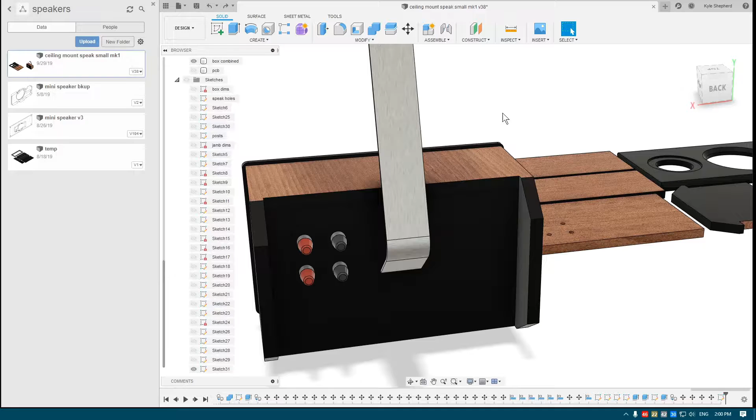So I realised I forgot something: the mounting holes required on this back panel. I already quickly drew out some of these holes, relatively evenly spaced. So I'll just go ahead and get these extruded.

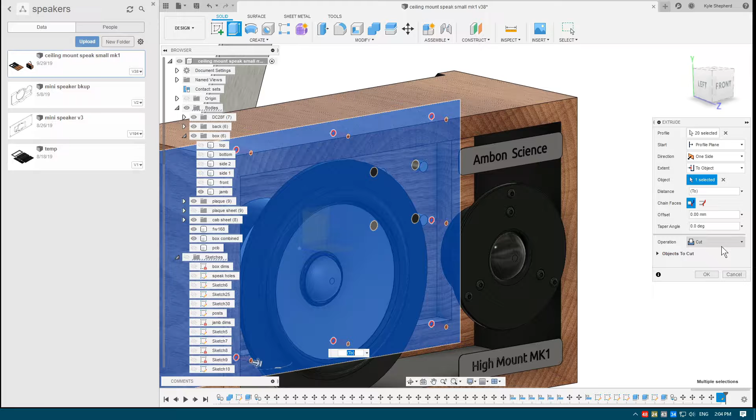Press E to extrude it. And oops, no, wrong option. To object. So cutting to the back here. It's only cutting the rear panel. So there we go. Now we have some well placed holes.

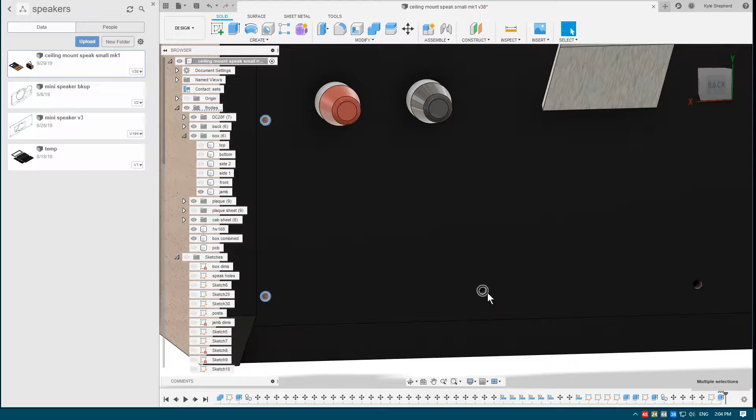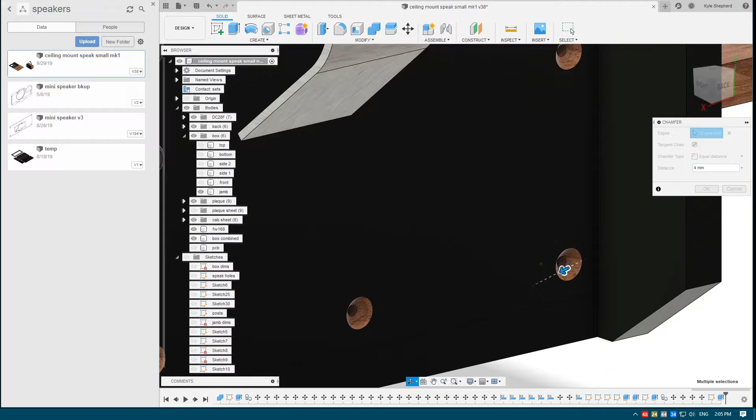I'm just going to select the profiles of these on their outside, and we want to add a chamfer. Now the chamfer is going to depend on the size of your bolts that you have in the end. I'm not quite sure what I'm going to use, but depending how you cut these, you can just adjust it later on. I'm just going to get this down roughly, see how it looks. That looks pretty good. That looks pretty nice.

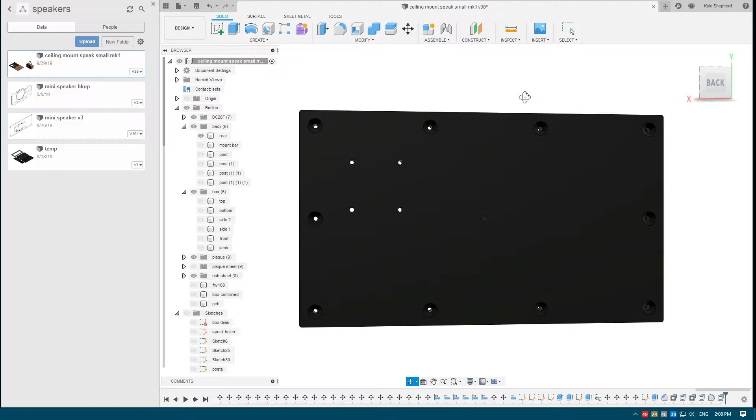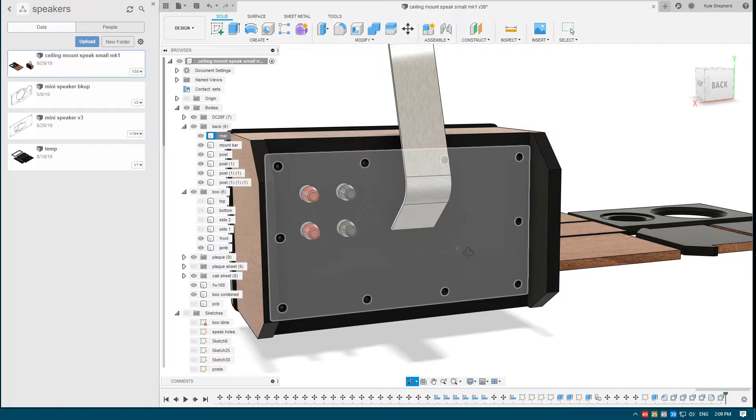And I'll do the computer aided machining for this because the blank panel I have at the moment, I will cut these out on that single panel, but I'll also update the total CAM file for when I do the second speaker, because of course this is a stereo set. The first one is turning out to be a bit of a test or prototype.

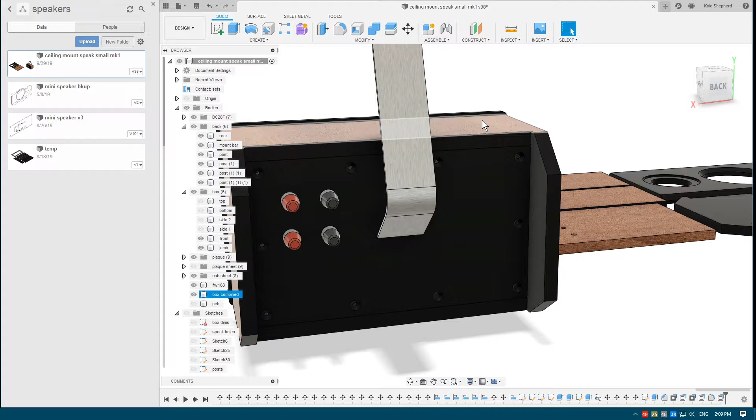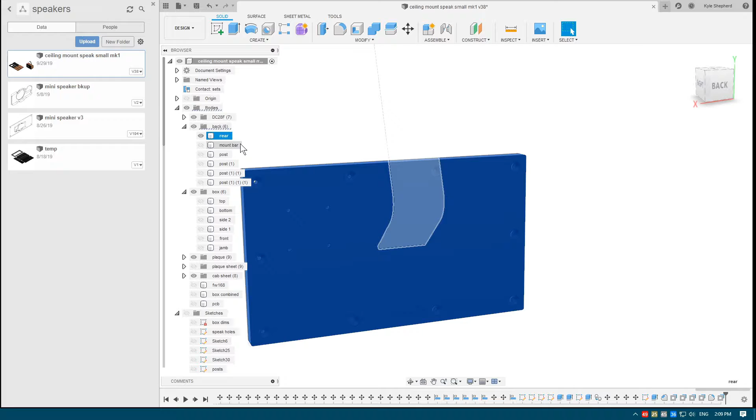So I'll just isolate this again. Go back into, actually I will duplicate it. Let's put you in here. Oops.

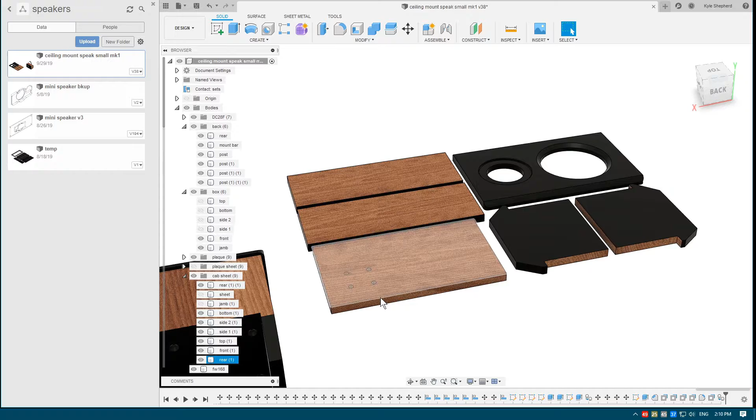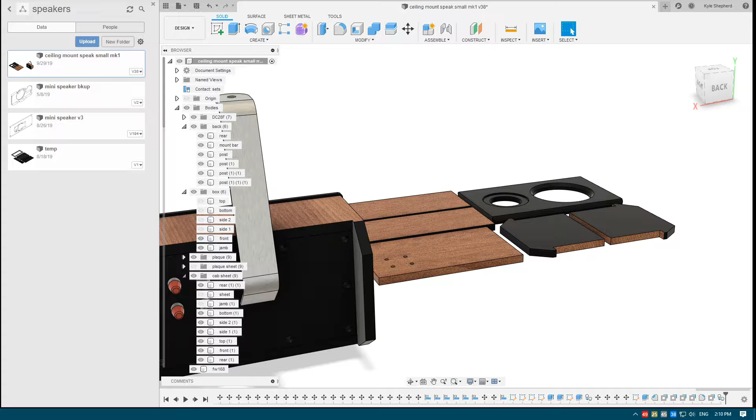The other thing I'll do, the jambs I have for the back of this, I might do a CAM profile cutout for that as well. I had an idea of how I can align them all, because my table saw is not the best. The blade is never 90 degrees for starters, so it's always slightly out. Where did that go? Here we go.

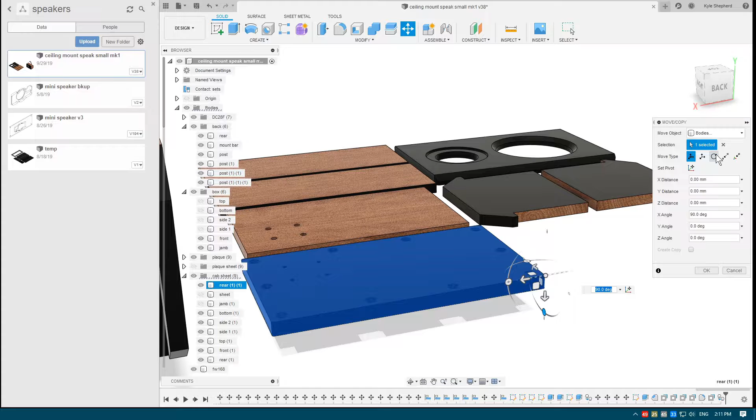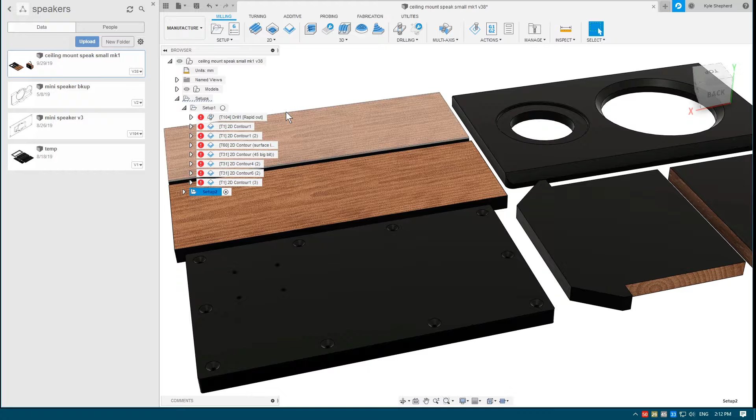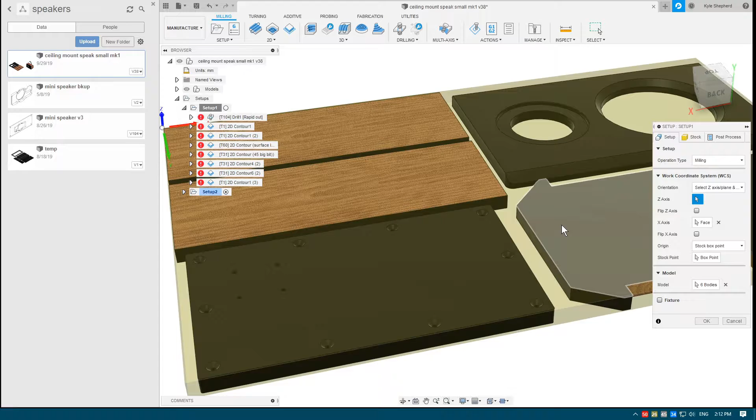Now we want to move a point to point. So move that point to there. Move. There we go. If I go back into the manufacture space, edit this. Where was it? So under bodies, we're going to re-add that body. And select our axis faces again. Select our stock box point again.

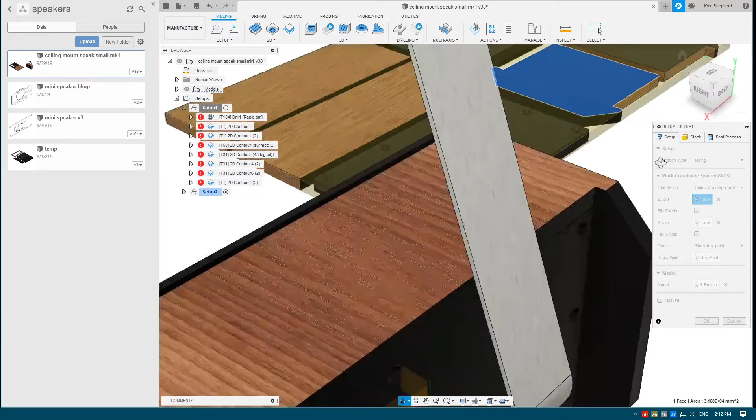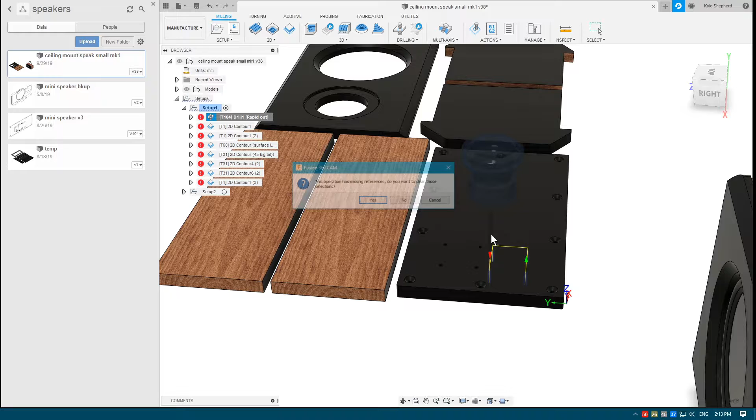Why is it using over there? There we go. So it keeps saying there's missing references. That's because I removed the previous one. So I'm just going to select all these holes again.

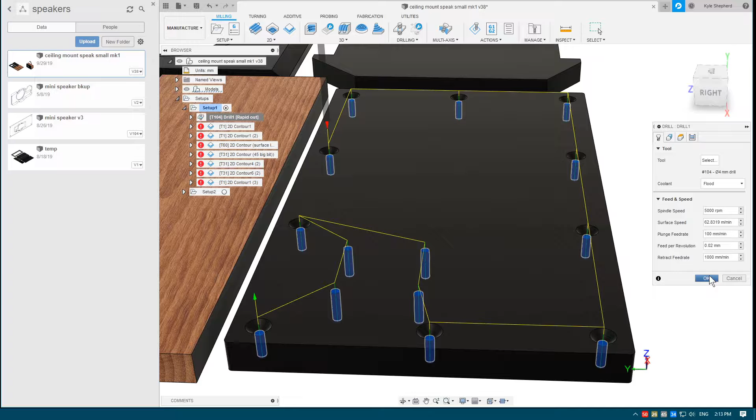But we now have the holes for the actual screw mounts. And those go all the way through, nice and easy. And we just have to go through for every one of these. I'm going to delete the original, select the new one.

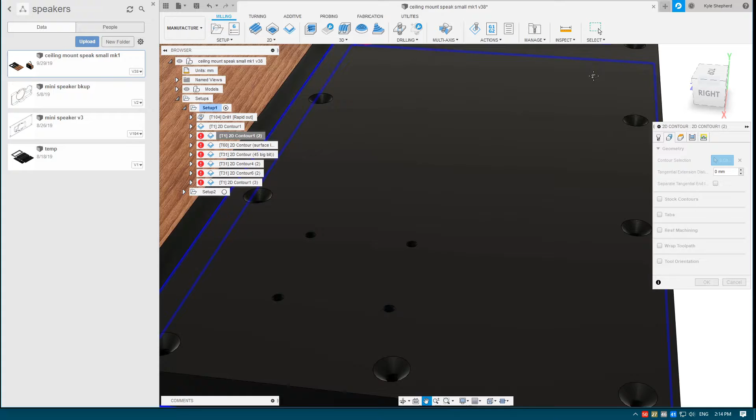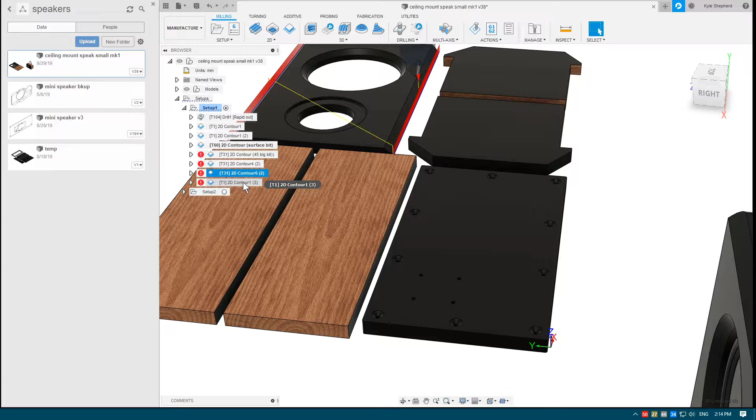So it looks like a bit of a big gap there, but that's just because our point here is offset because of our fillet. So delete that, just select here. Wait for it to update. Yes, don't need to do anything for that. Don't need to do anything for you either, or you. What I will do though is duplicate this. Move you to the end, I guess.

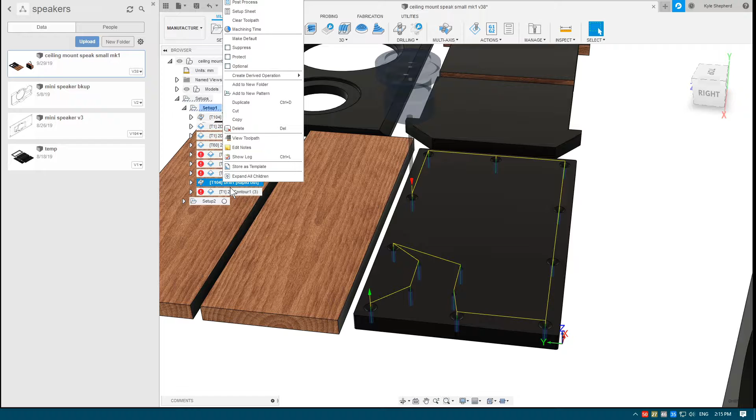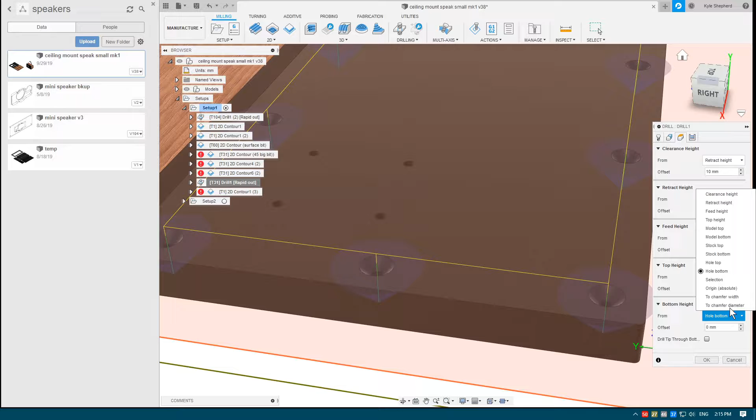I'm just using the chamfer mill. I'm going to remove these geometries because I'm not going to countersink those. And as a bit of a cheat, we'll disable this and set our bottom height to our selection. Now, see, it's still not matching exactly. Yeah, so we want an offset. There we go, looks about right. 1.5, 1.8.

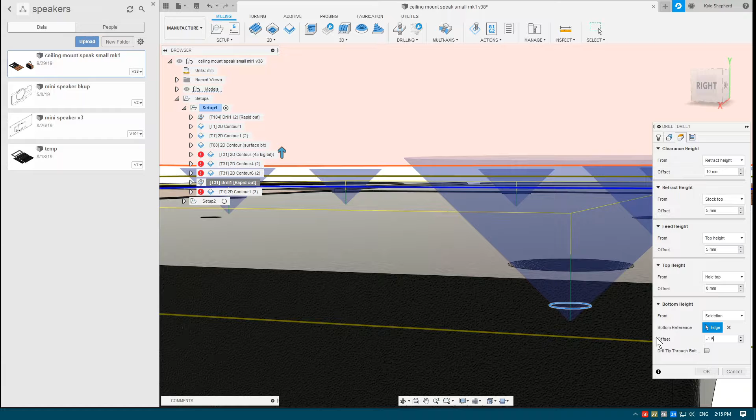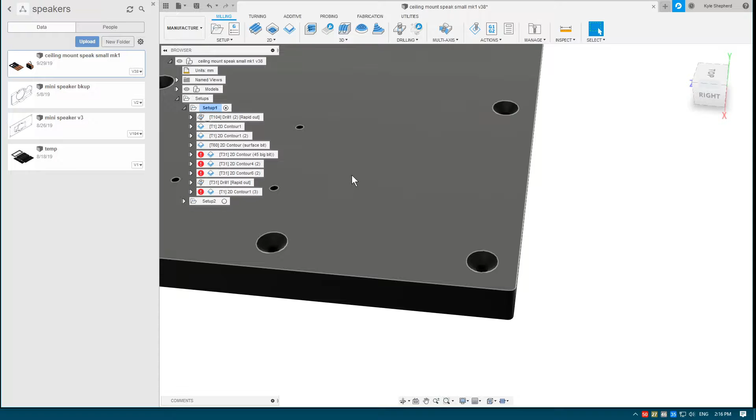There we go. So that's going to give us our chamfers, and you can adjust the height of that, and that'll widen the hole or shrink it. Once again, get the exact radius that you're going to need for whatever screws you have. And for these remaining operations, I'll just set them to generate. And wait a minute. There we go. So that looks good.

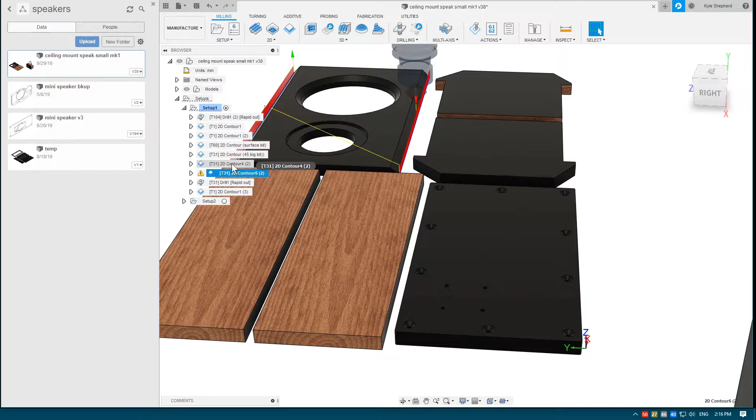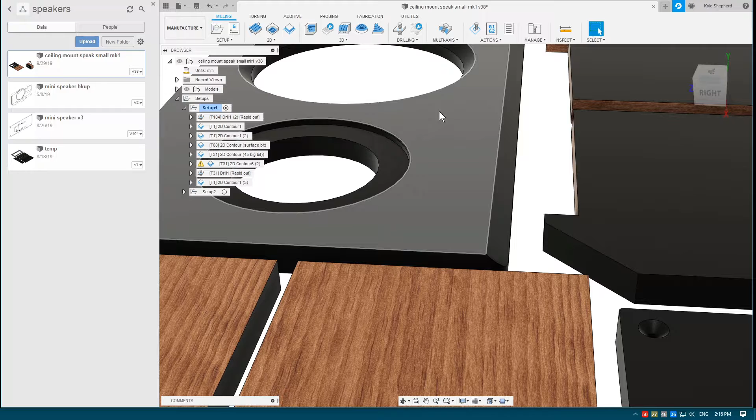I never used this, so I might delete this operation. I was too afraid because it's such a small chamfer. The boards, I just sanded it out. It looked pretty much fine. But if I do it via the CNC machine, I'm not sure how flat this is going to be. So you might have a slightly offset chamfer, which doesn't matter for something big, but for something tiny you might see it, because it will be a narrow hair here, but here it will be gouged out to like a millimeter or something like that. With a wide chamfer you don't notice such a difference.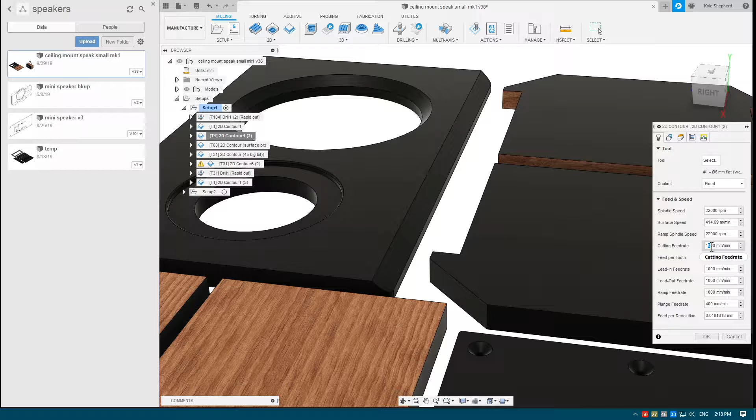Now, some other things I noticed, these cuts were very fluffy, so I think I'll just cut through it fast. And this could be sped up as well. This can be sped up, for a final cut here. It was quite slow. Can't remember if I sped this up because I've got quite a good finish with it, so I'll just leave it for now.

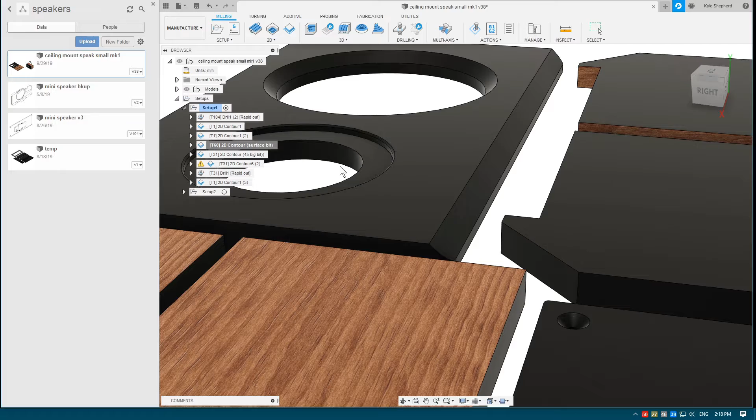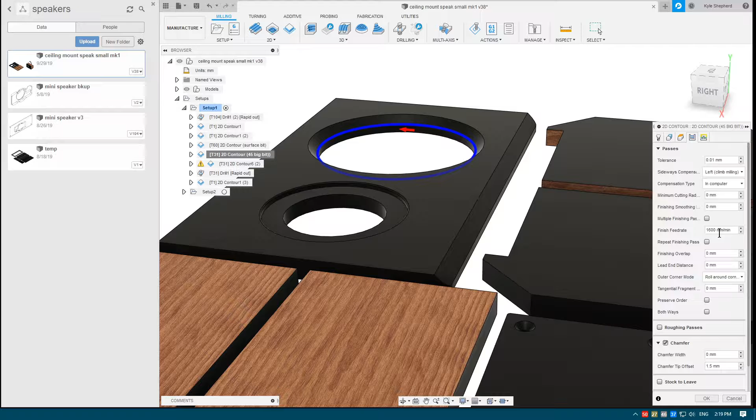So I've changed that. Might just set the clearance height to 0.5mm and set this to 1.7, so it'll cut a bit more in one go. Now this one, this was very slow. I'll set this to a normal high speed and I'll double check, where is it? Yeah, finish feedrate. So that'll cut relatively faster now, and I'll copy that over for this. Just double check, yep, so it's over there as well.

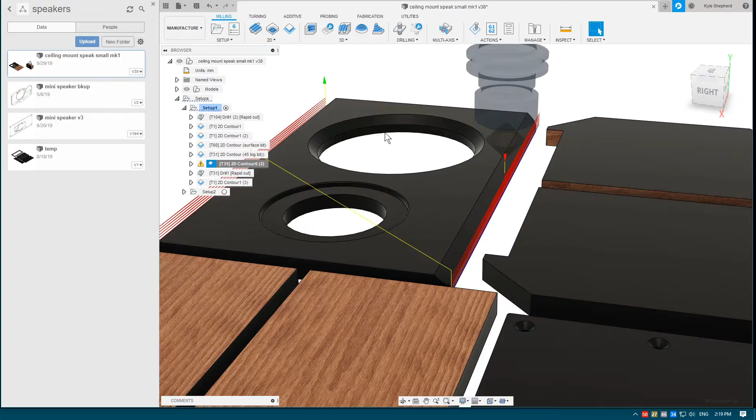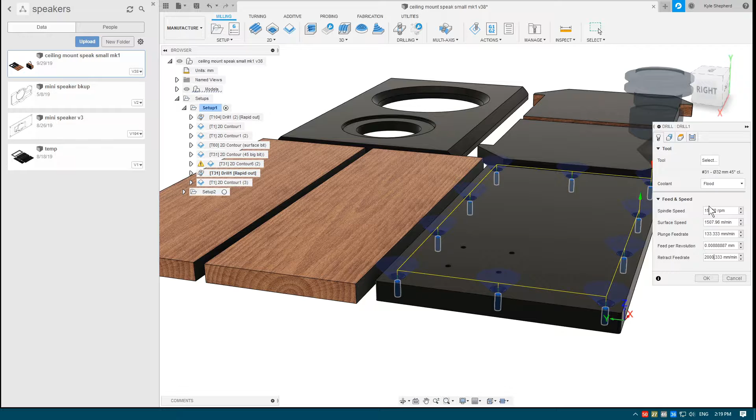I'll double check the speeds that this goes in at. Yep, so it plunges in relatively slowly. Retract is way too slow. Now, where is drilling method? Drilling, full retracts, so we'll peck down to do 5mm.

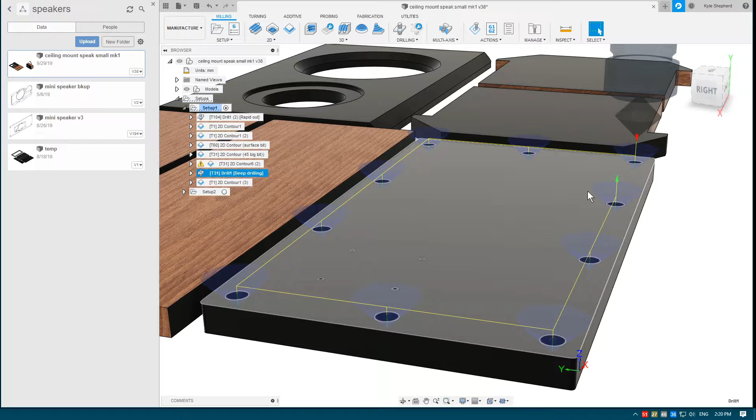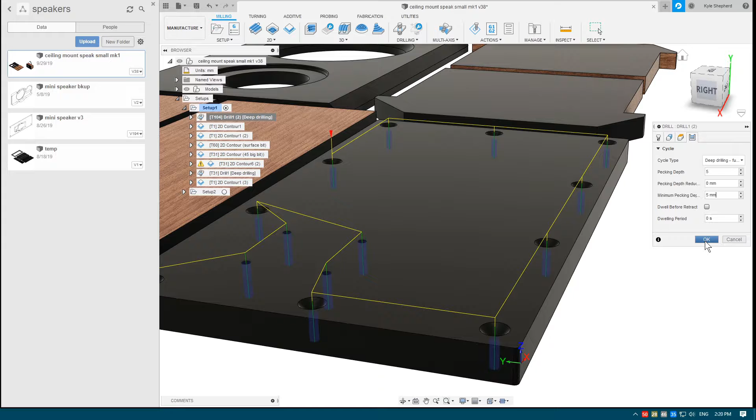Oops, I'm editing the wrong thing with that. Here we go, I want to edit the actual drilling operation. There we go, full retract. 5mm, it'll cut in, then pull out to let all the dust and shit out. I might just lower this to 2mm.

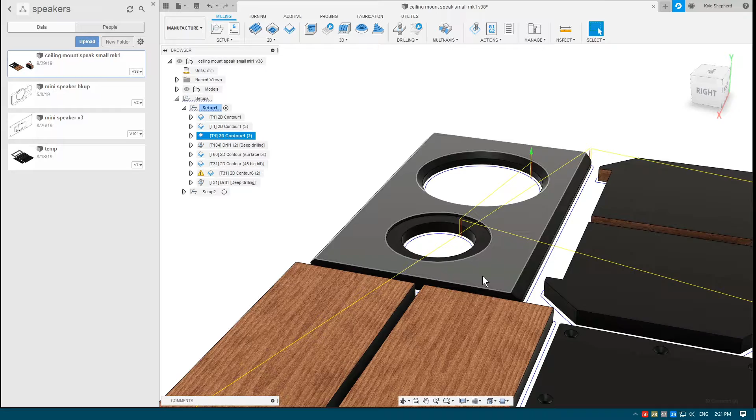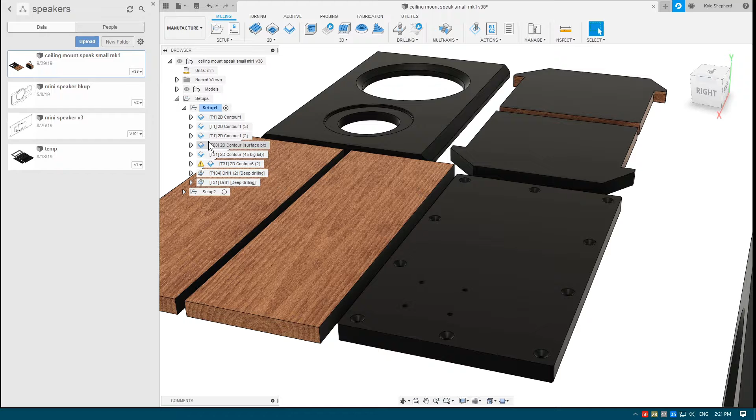Sorry, I've moved this. So the first set of operations uses the same bit, so all those will be done in one go now. Then next you have the drilling operation. Drilling operation can't really fail, so I'm going to move that to the end here. Move this to here.

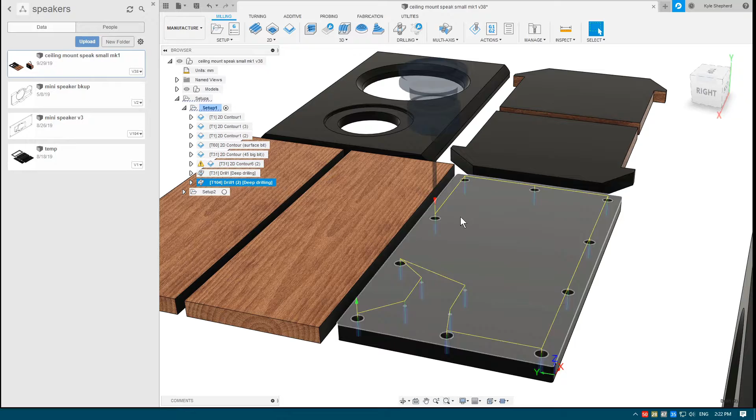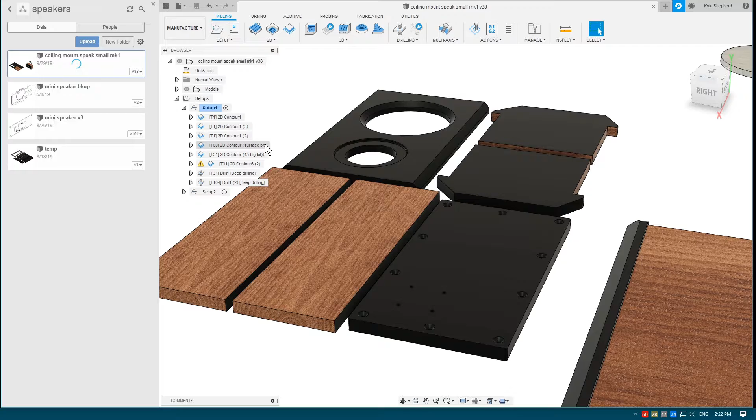So that's the flat surfacing bit, and these three use the chamfer bit, then these are actually drilled out. So if we look at the machining time, there we go, 35 minutes, so that's much quicker now. I'm always overly cautious when I first start a new project on the CNC machine. So yeah, this board will have all the proper holes in it, and I will also do the jambs in a moment.

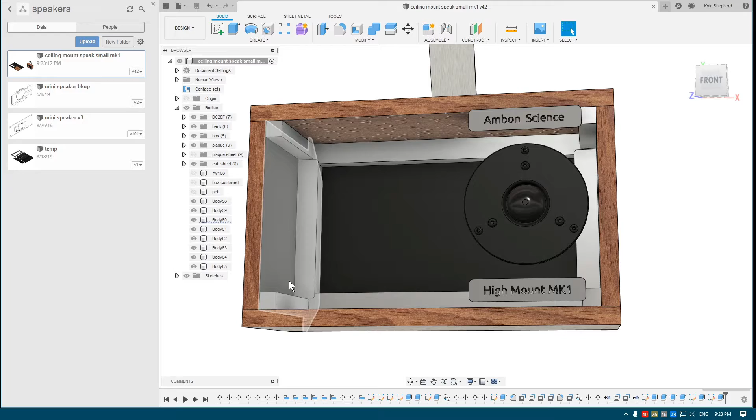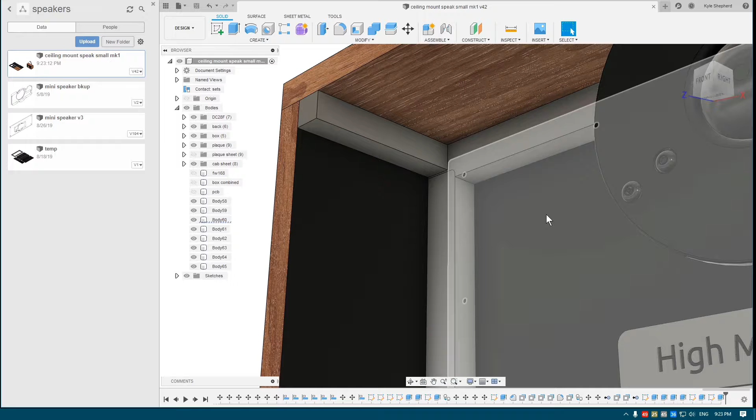Alright, so I've made the interlocking jambs that I mentioned before, and these sort of struts that not only strengthen it, they'll give me a block so I can place the height of these appropriately when I'm gluing this down, because there's actually a gap between the jamb and the back of this board, because there's going to be a seal in there, so I've just left 1 millimeter of space for that.

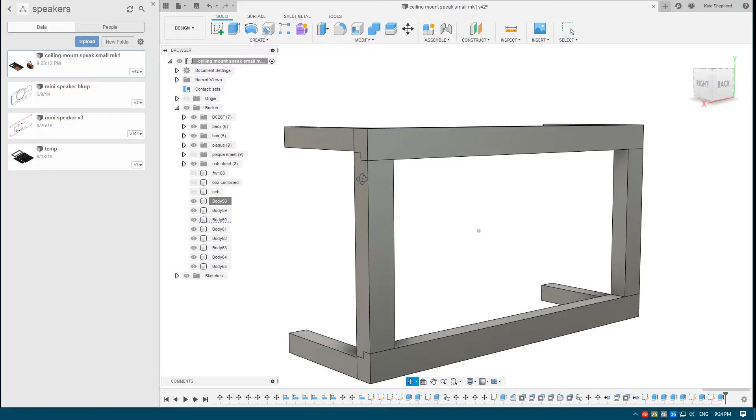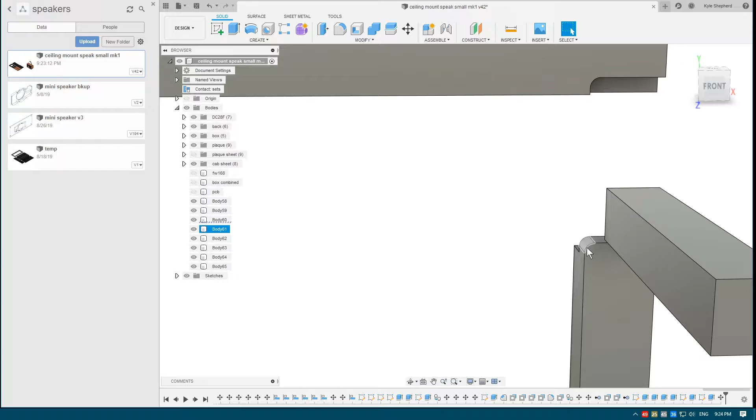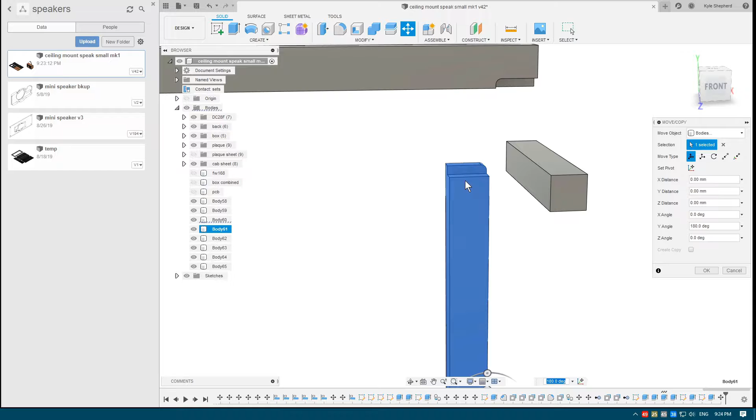So I will show you the bits in more detail, I guess. I really should name them, but oh well. So these should be able to cut these out, because here you have the rounded edge where that 6 millimeter bit's going to come in and then stop. But here I also have just a matching rounded edge, and this will be flipped around when it's cut. It'll be cutting on the same axis, so the bit can cut into here and it can just level around here as well. So I can easily cut these on the CNC machine, and they'll be all precise and locked together. It should be pretty easy to do.

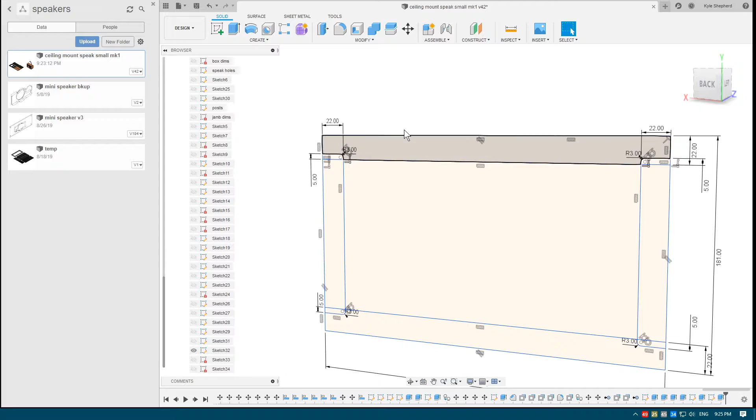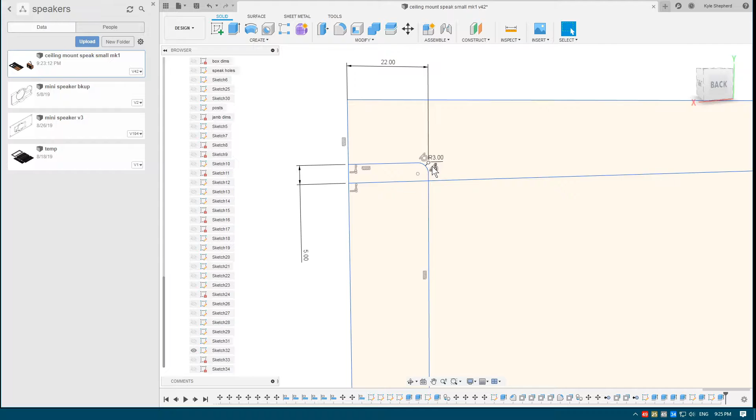The way I made it is just from this one sketch here. Oops, wrong ones. So this one. So that outer border is just the inner dimensions of the box. I've just given a 22 millimeter thickness for my overall jambs, and the 5 millimeter inset for here, and then a 3 millimeter radius fillet joining this, and then just extrude it all appropriately.

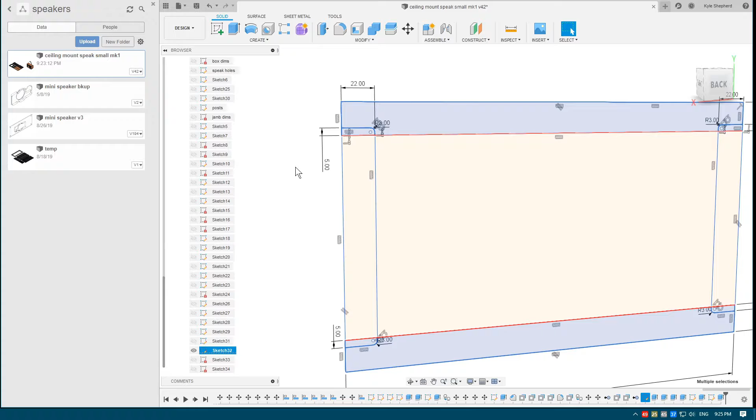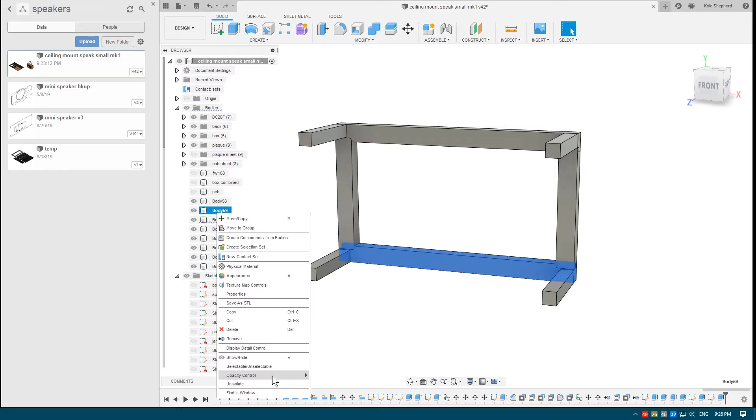So I extrude this section by 8 millimeters, and then I select these inner bits and extrude that again by a join function from the 8 millimeter bit I just extruded. So that joins them together, and you get this stepping here. So yeah, I will proceed to lay these out and do the CAM for them. I will just copy these all.

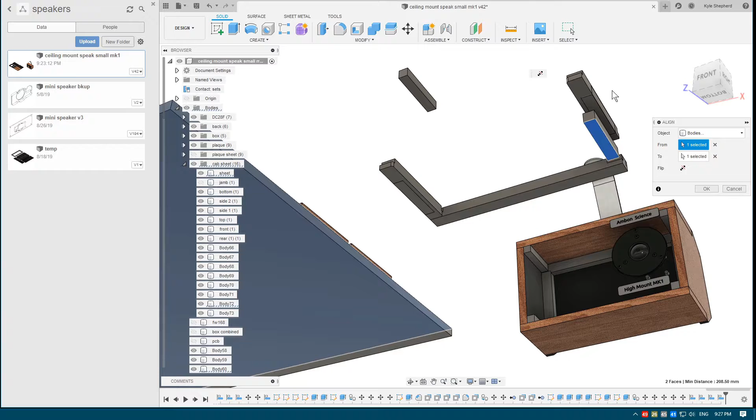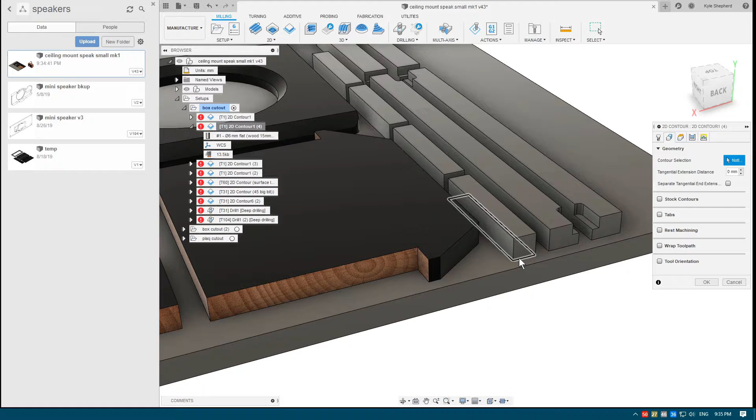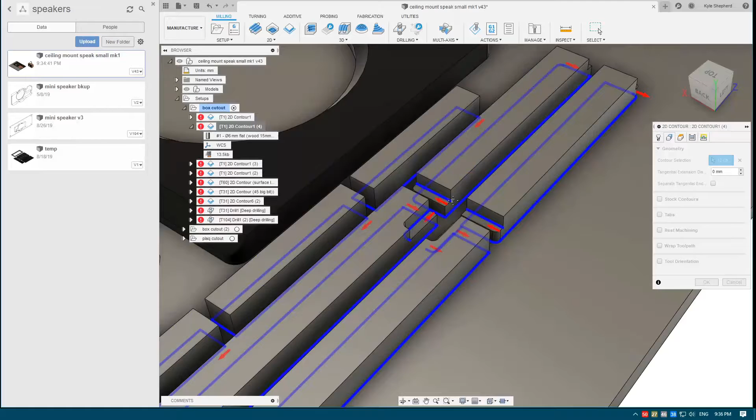I can go into orthographic mode, and I can start arranging things. I might stack them around here. I'm going to duplicate this. Just clear all those. So we're now cutting out these shapes. Actually, I will delete these because I have an offset which is going to upset those. So all those look good.

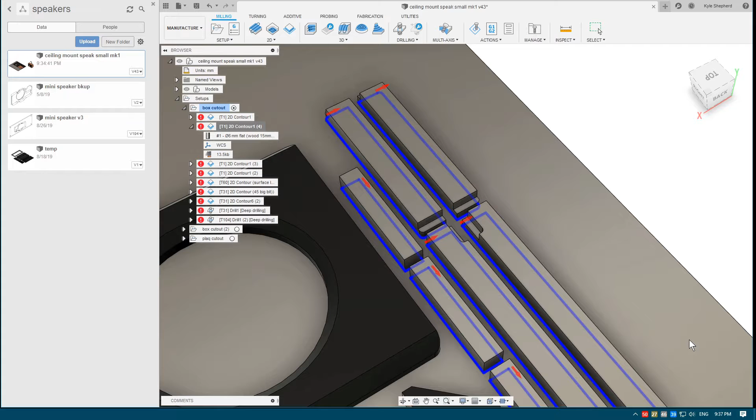Now, what I might do is do a negative, just a tiny amount, so there's a bit of slop with these so they can more easily fit each other. Actually, I'll do that. Yeah, that'll be fine. So that'll actually cut flush up into here, plus a tiny bit extra. So all these should fit most definitely.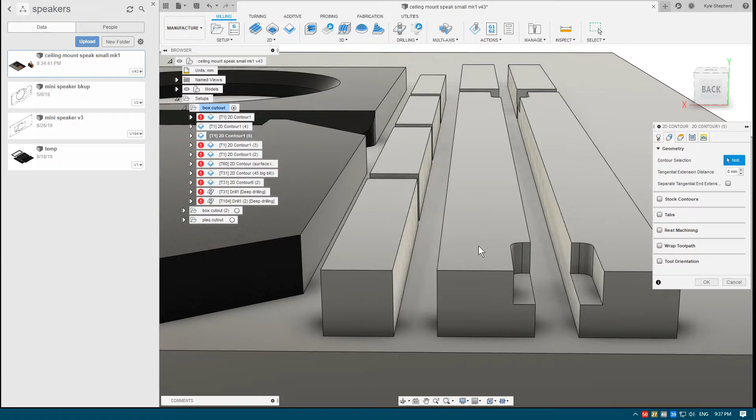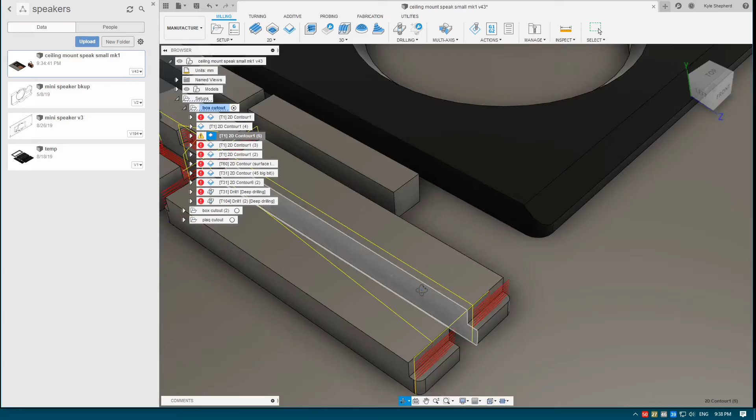I'm going to duplicate this again. I'll leave that on. I'll do 0 offset for the height. And we're only going to do these chains, the little locking arms. Oops. And that should have all appropriate offsets. Yep. That looks wonderful.

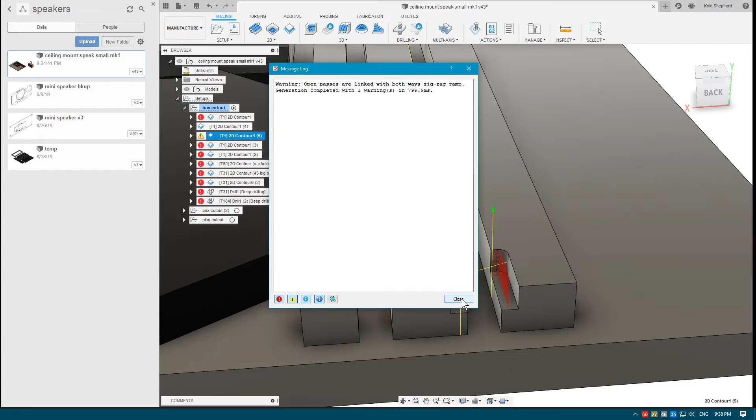Now, what is this? Open passes are linked with both ways, zigzag ramp. Not sure what that means, but according to these toolpaths, it looks fine. Just going to double check the speeds. Yep.

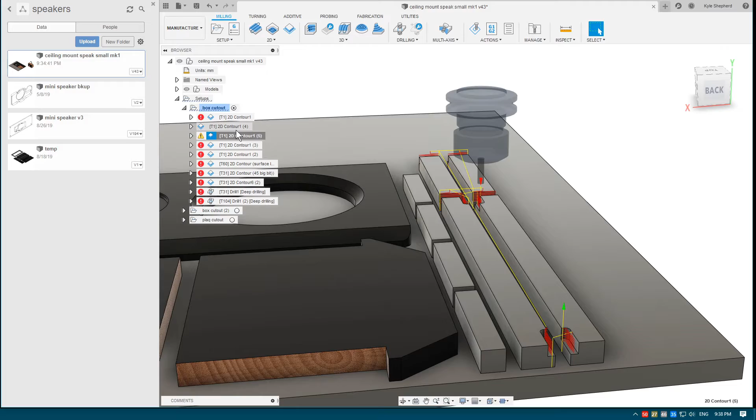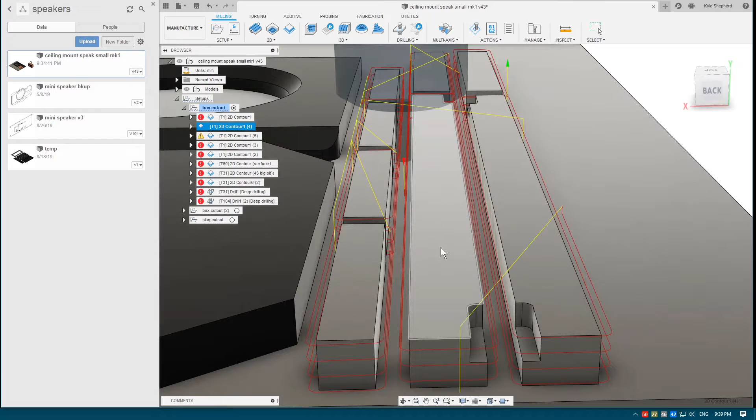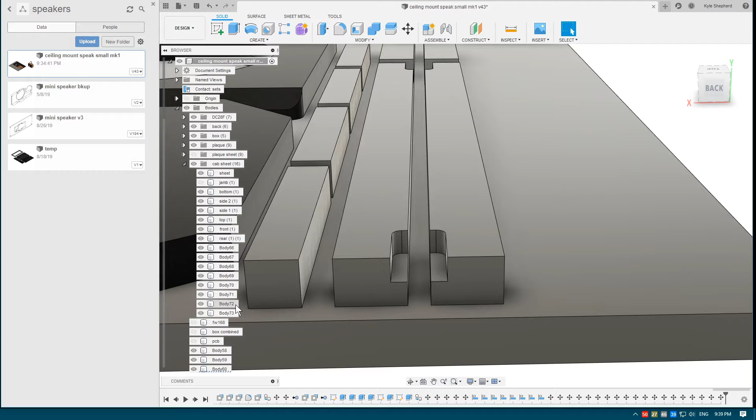Fair bit of space between these, so I might push these up a bit, just in the design space. Oops. 3mm. This will set by 3mm. Go back to manufacture. I'm just going to do a generate all and wait.

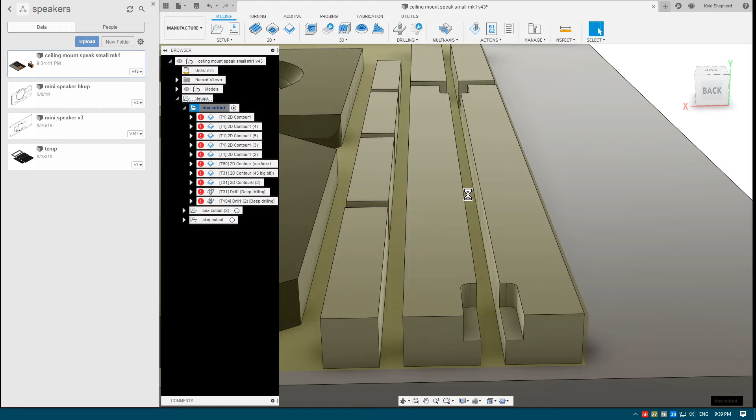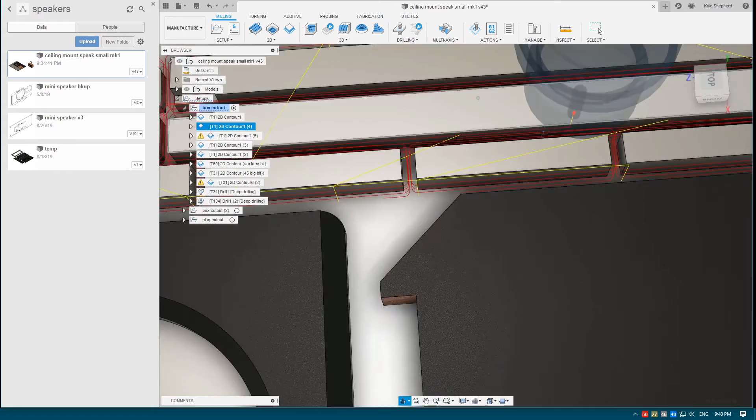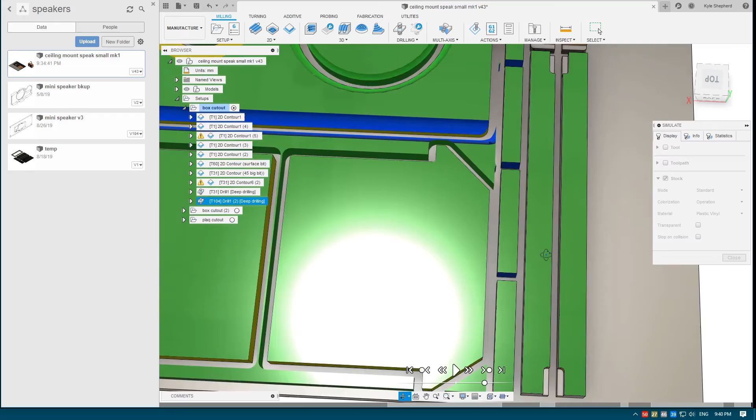So we have the contours with the offsets. Looks good. And these contours, yeah, that's a narrower space between them. And then our channels cut here, and then just the rest of the processes. So if I do a simulation, let's get rid of the toolpaths. So these are what all the bits look like, and they match pretty well. Yep, that looks good.

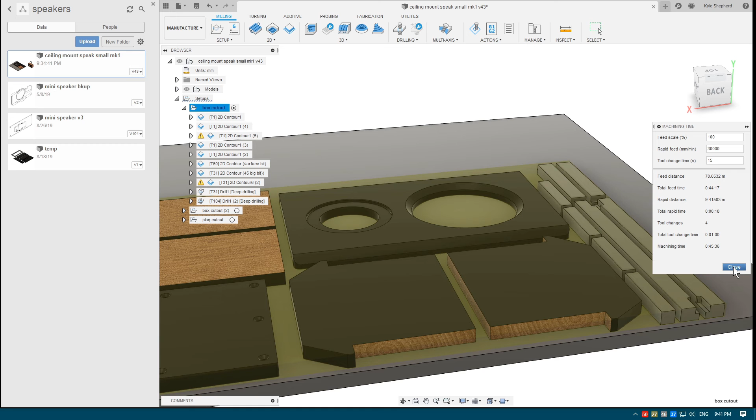So let's see how long this is. Now it's 45 minutes. Yeah, it hasn't added too much. The extra 10 or so minutes is well worth it, because these bits will just slot together fine and easily. It'll make assembling the second speaker way easier.